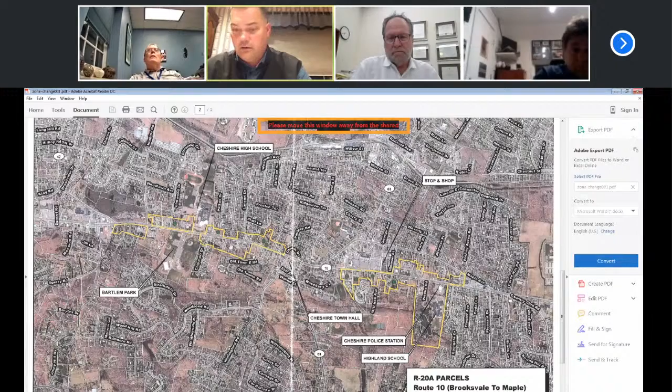Anybody? Okay. Seeing none. Do we have any comments from the public on this application? No, Mr. Chairman, no comments. Okay.

All right, John, anything else to add to this? No, I'm happy to answer any questions. I think it's an opportunity, and anything we do there under an R20A would be a special permit application. So there's an opportunity to review both the design, the architecture, the appearance, the use, obviously. So I think this is an opportunity to add an attractive use to this location, something that can be an asset for the town and be visually attractive.

So I'm hopeful that we have that opportunity to come in with a subsequent application that the commission will review under a special permit and a public hearing application. Yeah, it sort of makes sense. Everything else around it is R20A, so it is kind of out there on its own.

So, Mr. Kurtz, I'm sorry. Yes, I was on mute, I couldn't get myself off mute. So, quick question, John. Any residual effects from the gas station being there? Is there any contamination, anything going on the property, or is that all set?

Yes, there are some residual effects from that. It's been gone. We did not do it, our firm did not do it, but a separate LEP did extensive review over there. There is some residual issues, but they are not emanating from the site, and they're deep enough so that they're not practical to be excavated. So that any development there would be restricted in terms of excavation and the types of foundations.

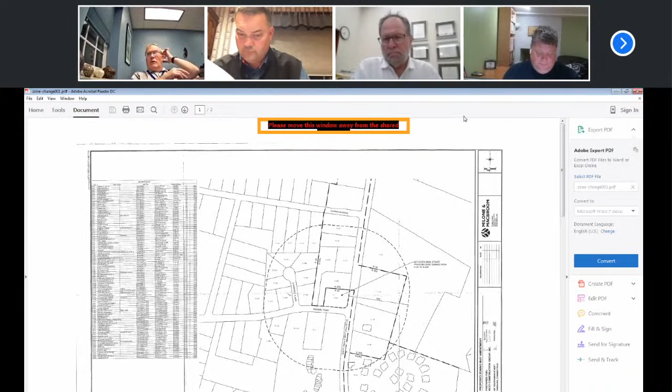Mr. Chairman, if I may, that information will be made available to the commission when they bring in a specific application for development. You will have the reports from their LEP, and you will see how that influences the way they're going to design the property. So we'll make sure that the commission gets that for the development application. We do agree with John's summary of the reports, but we'll give you more specific information when they bring in a development application. So, okay, thank you.

Okay, any other commission members? Questions or comments?

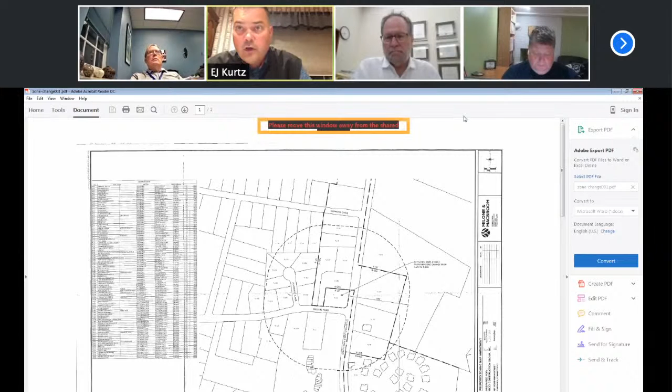Okay, I guess I'll be closing this public hearing. Thank you very much, Mr. Chairman. If I may, I was able to get Dave Carson on the phone. His computer's not working, so we won't be able to see him, but it looks like he'll be able to do a verbal testimony, and we'll try to assist him as much as we can.

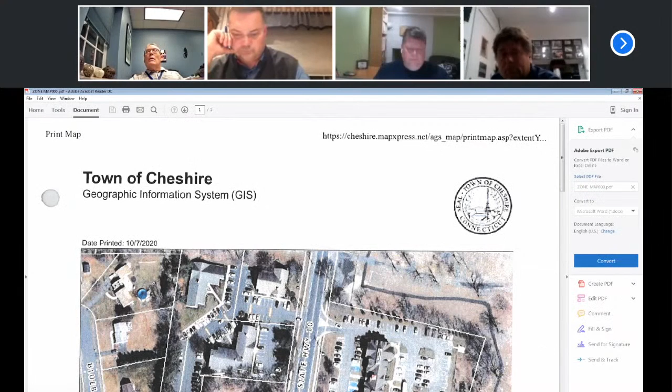Since we were hopeful that this piece could either be leased or purchased in the future, prior to our most recent expansion, we had done a master plan in-house to assure that if we were able to do this lot, we could interconnect it with the existing parking facilities, and we have been able to accomplish that integration and actually improve the overall circulation between those upper parking areas.

As noted on the plan, the area to the rear of that parking area closest to Reinhardt Road will be principally used for employee parking. The rest will be obviously available for customers.

This expansion would add 60 spaces to the existing 180, bringing the total to 240 spaces. At that number, a major traffic generator permit will be required for over 200 parking spaces. We have already been in preliminary contact with OSTA regarding this, and pending favorable action by your commission, we will be proceeding with that particular process.

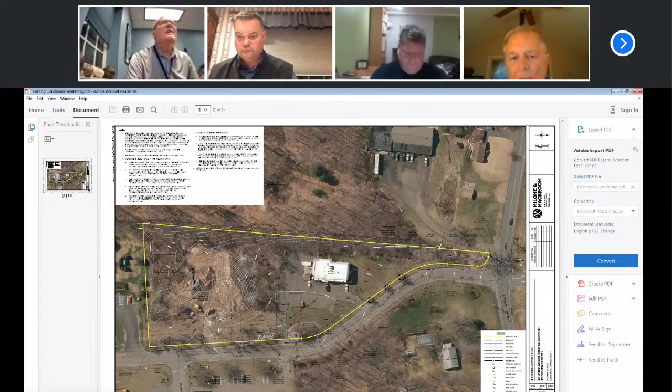The map in front of you is a colored aerial representing the existing conditions of the site. The orientation is with north to the right, so south is to the left. Diana Court, which the majority of the site fronts on, is at the bottom of the sheet to the east, and to the west is primarily undeveloped land. East Johnson Avenue is to the extreme north of the property, on the right of this map.

Currently, the property includes a small office and warehouse light industrial building with a fairly small parking lot, focused mostly on the northern side of the site. To the south, there are some stockpiles that have been there for some time.

Adjacent uses to the property on the east, the opposite side of Diana Court, include an office building and, to the northeast, a residential property. To the west is a light industrial building with the majority of that site being undeveloped, and to the south is an industrial bakery. All properties in the vicinity, including this one, are in the I2 zone.

A significant element and restriction to the site is two easements located almost parallel to Diana Court: a 50-foot wide gas transmission easement and an electrical distribution easement, which puts some limitations on the property in terms of grading restrictions and landscaping, which I'll touch on a little bit later.

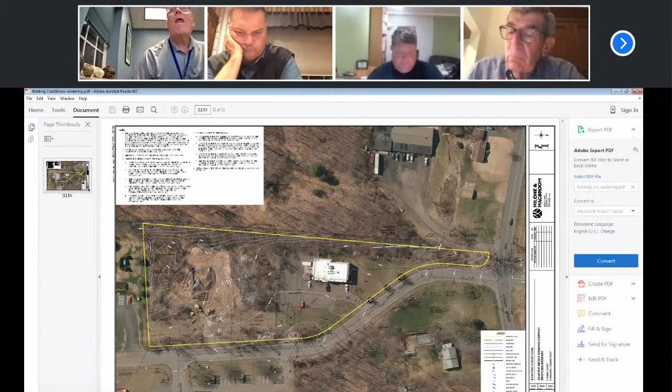All utilities are available: natural gas, public water, sanitary sewer. There are wetlands on the site, primarily in the northwesternmost part, really amounting to a small drainage ditch capturing runoff from properties to the west. A wetlands permit was granted by the Inland Wetlands and Watercourses Commission.

The plan in front of you represents a colored rendering of the proposed site conditions. What we're looking to do is keep the existing building in place, which will be used for office purposes for the proposed brewery, Counterweight Brewing. Counterweight seeks to build a 20,000 square foot brewery on the south central portion of the site, which will be connected to the existing office building with a greenhouse-like structure and a large patio area.

As part of this brewery, it will include a tap room or tasting room, which is a small portion of the overall size of the building but has a high demand for parking. We analyzed the brewing operation as an industrial use, the tap room as a restaurant use - although I don't know if it exactly meets the standard of restaurant, it seemed the most appropriate approximation for this style of use - and also a minor office component in the existing building. The result is that we need approximately 108 parking spaces on the site.

We're proposing 118 spaces, so a little bit beyond what's required by the regulations.

We are installing a new parking lot adjacent to the existing building, to the north of it, and larger parking areas to the east and south. The south side of the building will also include loading areas for tractor trailers and small box trucks.

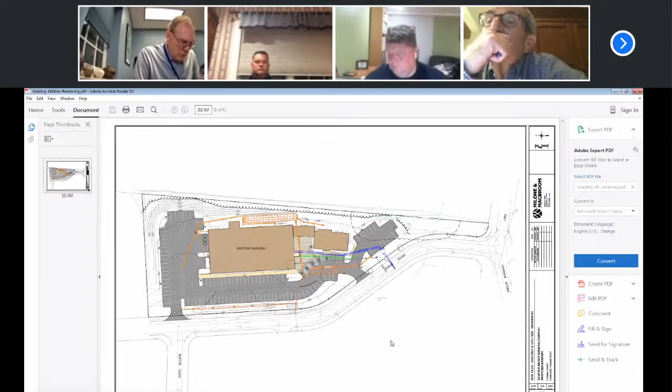Additionally, the site plan includes a detailed landscaping plan which meets the zoning regulations for shade trees and parking areas. Going back to the gas easement, we're limited in terms of placement of shade trees within that area. They do clear-cut those gas easements periodically, so we're limited to small shrubs and decorative grasses within the easement itself.

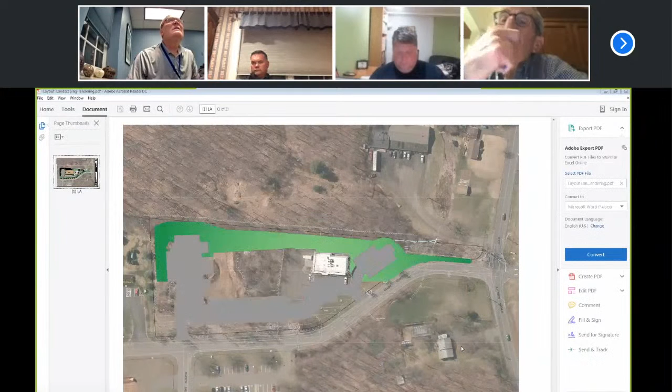This plan in front of you represents a colored version of our landscape plan, with a line of decorative grasses between Diana Court and the parking lot, and some shade trees where we can place them without interfering with existing utilities, existing easements, or proposed site features.

Lastly, with the increase in parking spaces, building coverage, et cetera, we have a change in coverage that results in an increase in stormwater runoff. To mitigate that, we've proposed 3 distinct underground stormwater storage areas sized to allow for no increase in runoff for up to the 100-year storm event.

All stormwater will be directed on site to these underground systems via a standard pipe and catch basin system, and a proprietary oil and grit separator contact unit will be installed prior to the underground storage area to provide adequate water quality flow, trapping oil, floatables, sediment, etc. All designed in accordance with the 2004 DEP quality manual.

With regards to traffic impact, we provided a traffic report prepared by Dave Sullivan of our office. His findings, based on proposed traffic generated using the ITE, Institute of Transportation Engineers manual, show that this use, along with proposed uses not yet operational in the vicinity—namely Whole Foods and a medical office building on West Johnson Avenue—will have minimal traffic impact. In fact, there'd be no discernible change in level of service on East Johnson Avenue and out to East Johnson Avenue and Highland Avenue.

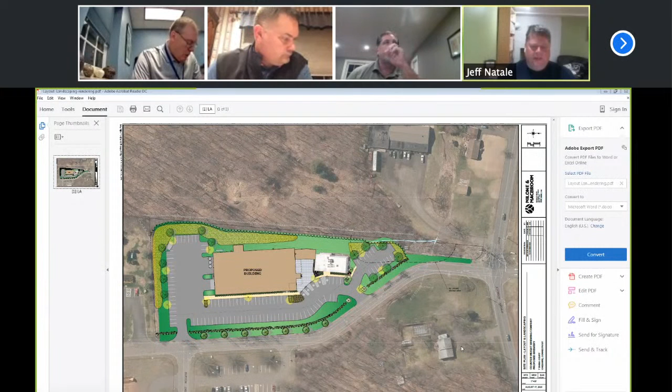I believe I read in the application and the information we received today that the area between the two buildings is where the outdoor seating would be. Correct. Thanks.

Chairman? Yeah, Scott again. Is there going to be any kind of food? Is there a restaurant in here? Are there food trucks? If there's food trucks, is there area for parking of those food trucks? Do they take up customer parking spots? Yeah, our plan is to have rotating food trucks as we do in our current location. How they operate currently is they usually take up about two spots when they visit us. As far as indoor food, we currently have a food service license that allows us to heat very limited menu items, but only in the event that a food truck cancels or somebody's not available to service our customers in that regard. Thank you.

Okay, any other commission members with questions? Bill, do we have comments to read into the record on this one? I do, Mr. Chairman. Fire Department, dated September 24, 2020: the Fire Department has reviewed the above application for the planning and zoning process. We recommend the following common stipulations: one, a fire hydrant will need to be installed in the area of the fire department connection, final location to be approved by the fire chief or his designee; and two, fire department approved emergency knox boxes will need to be installed and maintained, final locations to be determined.

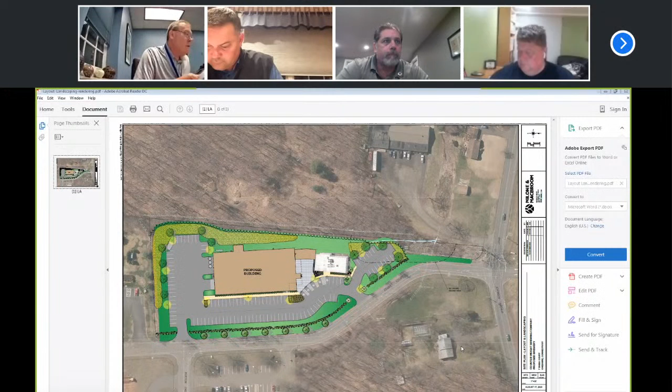Let's see, I have the engineering department comments. We had comments again from Anchor Engineering. They had a number of comments that were addressed. We did get a letter from Don Nolte dated September 23rd, 2020. This department concurs with the attached review comments by our consultant. We suggest that they be considered for incorporation as conditions of approval if the Planning and Zoning Commission grants a permit. Let me find their comment, hold on.

Do you have a question? Okay. Sean, go ahead.

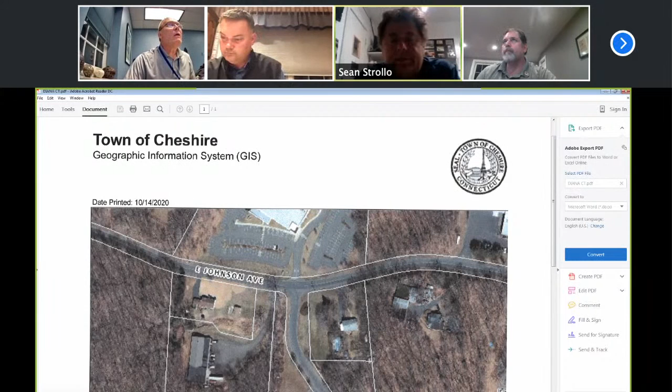The existing building that's there on the site, I know you're incorporating it. Are they doing any changes to that building, or just branching off and joining the two with the greenhouse?

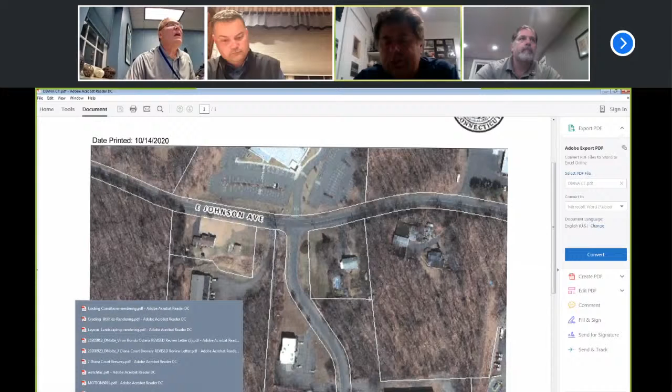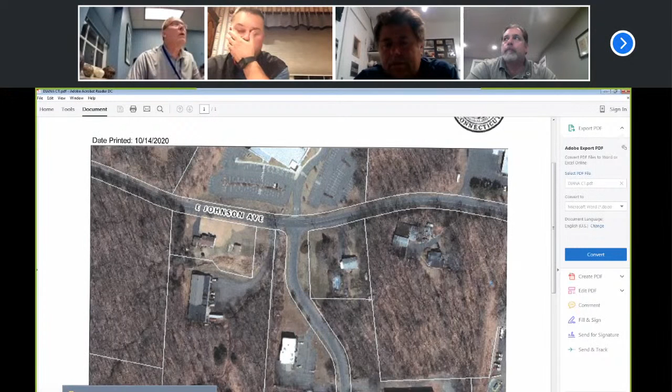There's no proposed changes to that building other than a door to connect that greenhouse. On that building right now there's a garage on the left-hand side of the existing building. Is that going to be turned into offices, or just join into the other part? The garage door area would connect the buildings, and the rest of the building would be office space. So the garage area will be where people sit also? That'll be closed off as you enter the new building, and that'll be overflow storage for us.

On the new building, on the left side, what's the distance between the parking spot and the edge of the building, Brian? My scale with me, it's over 100 feet. It's over 100 feet? That's right.

As far as deliveries, on those big tanks, do they come in with tankers or a box trailer to deliver things to make the beer? We have basically trailers that come in with our bulk grain that fill the silos, and it gets blown pneumatically into the silo. We get those usually about once a month, and the silo's worth will last us roughly in the new space about 30 days.

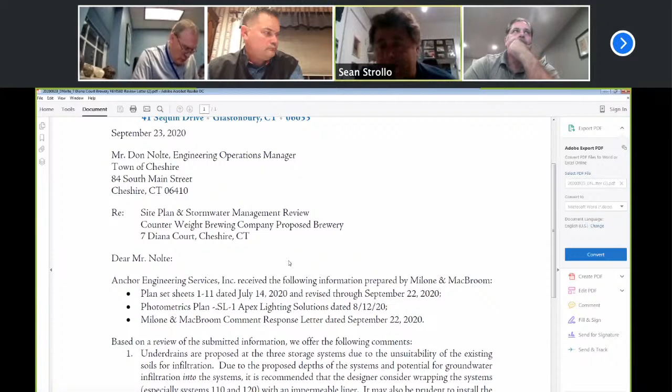Mr. Chairman, if I may, just to read the engineering comments. I have some comments for regional water, but these are the revised county comments dated September 23rd, 2020. Based on a review of the submitted information, we offer the following comments. One, under drains are proposed in three storage systems due to the unsuitability of existing soils for infiltration. Due to the proposed depth of the systems and potential for groundwater infiltration into the systems, it is recommended the designer consider wrapping the systems, especially systems 110 and 120, with an impermeable liner.

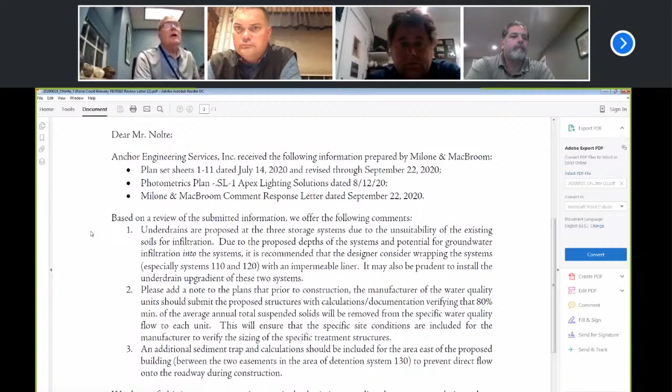It may also be prudent to install underdrain upgradient of these two systems. Two, please add a note to the plans that prior to construction, the manufacturer of the water quality unit should submit proposed structures with calculations, documentation verifying that 80% minimum of the average annual total suspended solids will be removed from specific water quality flow to each unit. This will ensure that the specific site conditions are included for the manufacturer to verify the sizing of the specific treatment structures. And three, an additional sediment trap and calculation should be included for the area east of the proposed building, between the two easements and the area detention system 130, to prevent direct flow onto the roadway during construction.

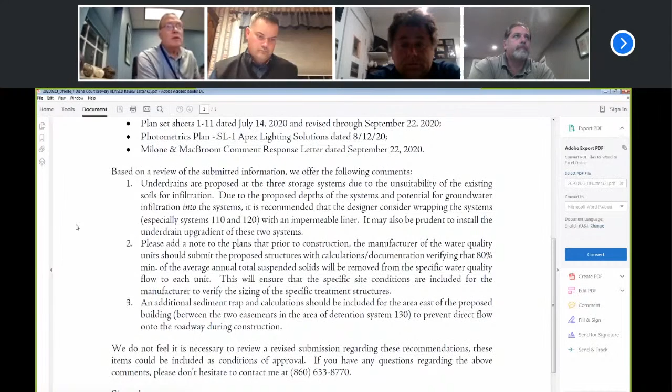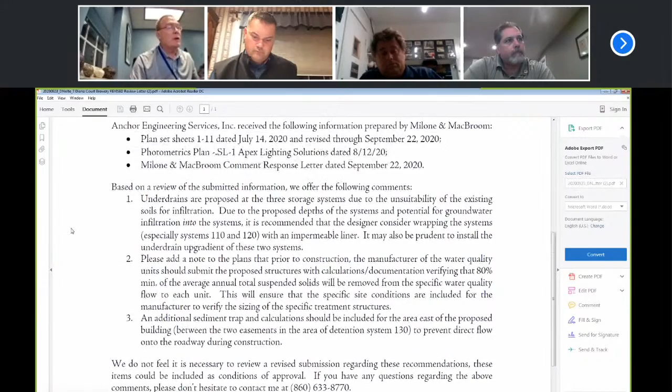We do not feel it's necessary to review a revised submission regarding these recommendations. Those items could be included as conditions of approval. If you have any questions regarding the above comments, please don't hesitate to contact me. It's Denise Lord, professional engineer from Anchor Engineering. And as I noted, Don Nolte is satisfied that these can be included as conditions of approval.

And I do have some comments from the Regional Water Authority dated September 3rd, 2020, regarding Counter Weight Brewing, 7 Diana Court. The Regional Water Authority has reviewed the above referenced application. The property is within the North Cheshire Aquifer Protection Area. The applicant is proposing to construct a 20,000 square foot building and related parking for a brewery. A brewery is an allowed use in the Aquifer Protection Area.

Stormwater will be managed using infiltration galleries with a hydrodynamic separator and isolator row to act as pre-treatment prior to infiltration. The building will be heated with gas, connected to the sanitary sewer, and served by public water.

Based on the information submitted, we have the following comments: first, the erosion control plan appears adequate. Second, the stormwater management system is acceptable to the Regional Water Authority. The pre-treatment of stormwater prior to infiltration in the Aquifer Protection Area is highly recommended by the Regional Water Authority.

Third, during construction, all fuel, oil, paint, or other hazardous materials should be stored in a secondary containment, removed to a locked indoor area with an impervious floor during non-working hours. Fourth, if fuel is to be stored on site, it should be located within a secondary containment system to prevent leaks from entering the environment, sheltered from precipitation, and in a secured area.

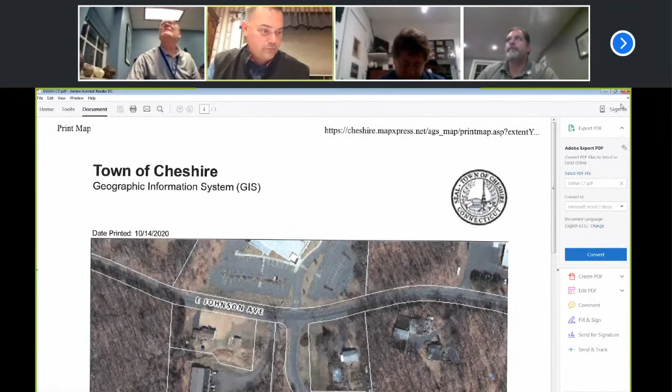Ryan, you said there was somebody from Borghese on the call. Can you go over quickly a little bit of the building, tell me where the public is going to walk in, and maybe if there's a separation between where the brewing is done, just a quick overview of the building would be great.

Sure, do you have a copy of the floor plans there? I'm not sure I have them. The Commission has them in front of me if you can't pull them up on the screen. Yeah, it's good.

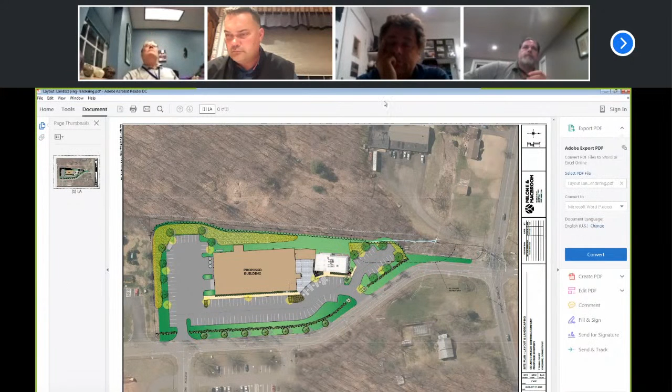Okay, so the way the building's set up, here's the large portion of the building, here's the small connector, and here is that paved courtyard area. The main entrance is going to be into here, this being the tasting room with the associated bathrooms. So this is pretty much the division between the public area and the brewing area.

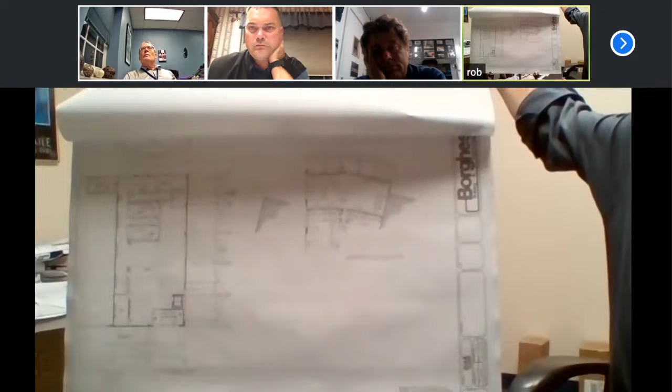In addition to that lower level public area, there is a mezzanine above that which would have another tasting area above that with associated bathrooms. Mixed in with that tasting area in the back are some offices directly associated with the brewing process. Same thing down on the lower level.

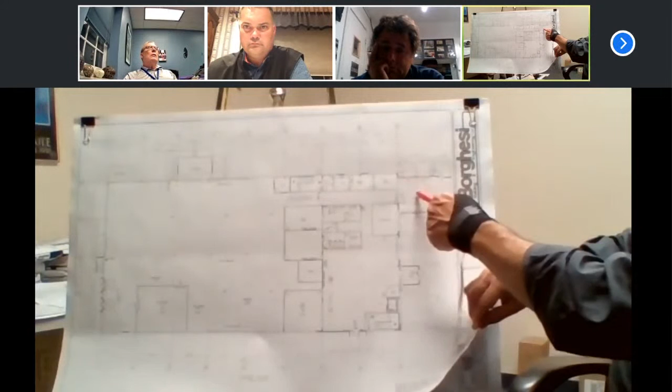There's some support areas, a small lab and office, break room, and tool room. Then adjacent off of this tasting room in the back, that's where that connector building is going to be. It's kind of like a greenhouse. We looked at doing an actual greenhouse, but there were a lot of issues with that.

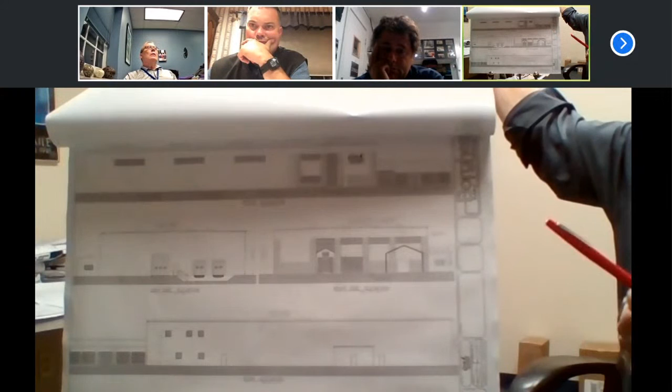So if you look at the elevations themselves, it's going to be a hard roof structure. The walls will be operable glass doors that can be opened up so in warmer weather it becomes more like a pavilion type space. That connects the building to the existing building, connecting the two buildings.

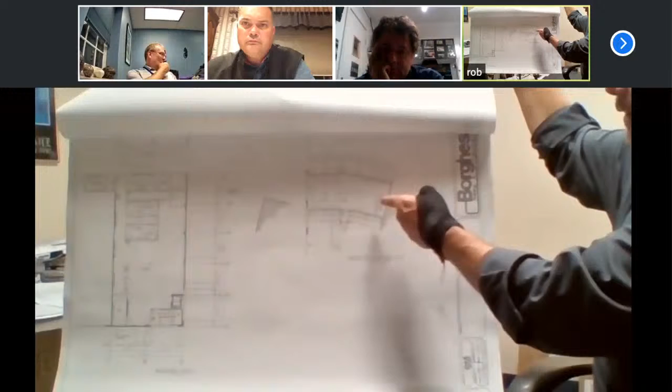So that actually goes—if you look here, this is the main building, the brewery building. Here's the connector, and it's going to attach to the left corner if you're standing in the road. What we're going to do is cut in an overhead door so you can get between the two buildings.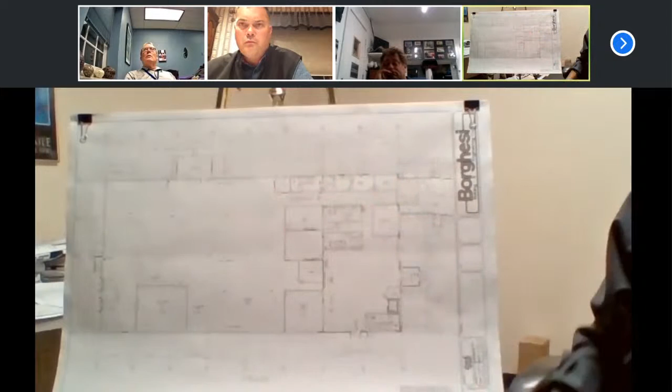But the public area, I'm going to say, is really an area 50 feet by the width of the building, or the depth of the building, which is 100 feet. So you have 5,000 square feet dedicated to that public space. The rest is the brewery area, the actual production space.

Okay, great, thank you. Any other commission members' questions? Mr. Ricardo: those grain silos, are those milled grains or are they whole? Do you have to worry about any kind of explosion possibilities with them? No, they go into the silo whole and we mill them inside the building in an explosion-proof room.

Got it. Elevation of these two buildings, are they both the same height? Is one higher than the other, the pre-existing building?

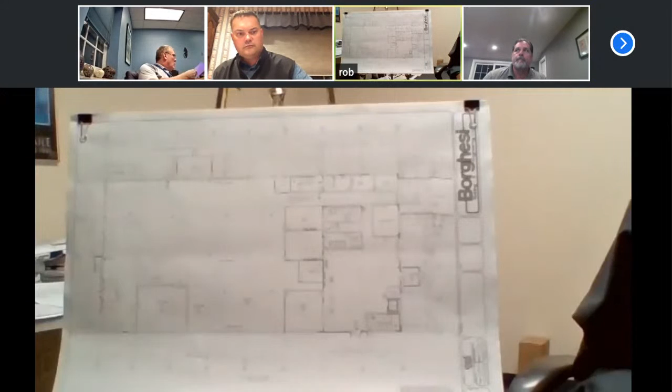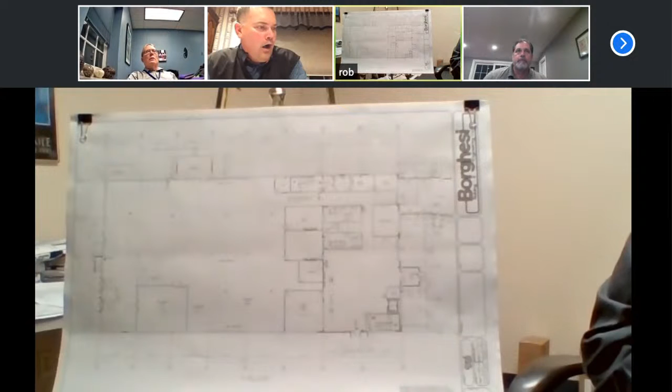Say that again? The elevation of the existing building and the new building. It's a height difference - I think Ryan's got that on his drawing, about a 2-foot height difference between the two. Reason being, Ryan was limited as far as what he could do for grading because of the gas transmission line, so that set the tone for the height of this building. That connector building is actually going to have a pitched floor from one building down to the other.

Okay, any other commission members, questions? No, do we have any public questions or comments on this? No, Mr. Chairman. Mr. Fazone, was that the end of the presentation? Anything else to add? No, I think that's it.

Mr. Chairman, do we expect that any further input will be needed at the site plan portion of the meeting, at the regular meeting? We took it all here. I don't see why anybody else would have anything more. Is there anything else you want to say? No, I just wanted to - it was meant to be incorporated all in one part here.

Okay, thank you. In case you want to check out and hang out with your kids, in other words? Stop my video at least.

I got it. Okay, with that, I will be closing this public hearing. Thank you. All right, moving on to our last item.

A special permit application of Hope Reinhardt, 104 Elm Street, for nonprofit used bookstore training. Special permit application of Hope R. Reinhardt, 52 Williams Road, Cheshire, Connecticut, 06410, for a nonprofit used bookstore training facility or training location. Property located at 104 Elm Street, Cheshire, Connecticut, generally shown on Assessor's Map number 64, lot number 268, in an R40 zone. Packet information is available for review on the town website homepage under Documents, distributed and displayed during virtual meetings.

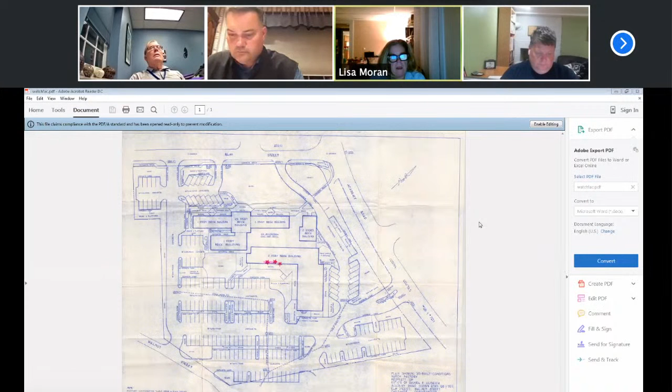We're renting in the lower level at the Watch Factory. It's 2 spaces actually, 104 and 105, about 1,600 square feet. We have an entrance and an exit door, 2 bathrooms, a small kitchen. And what we will be doing is hiring and training kids in our community that have special needs to work in a retail situation. We'll be selling used books and some crafts that the kids will be making. I don't know what else to say - I guess that's it.

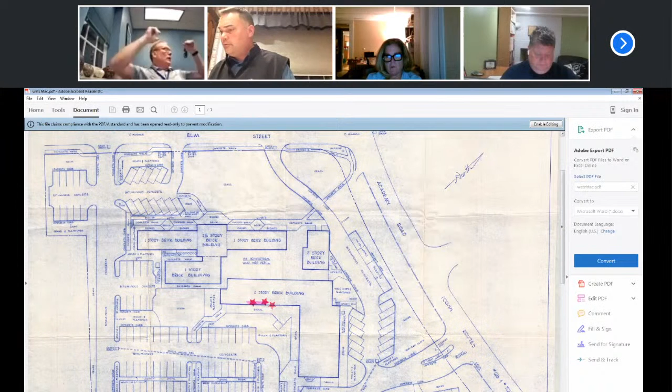Okay, sounds like a worthy cause. Anyone have any questions on this application? None. Okay, how about comments? Any comments? No, Mr. Chairman. Suzanne, nothing, right? No, Mr. Chairman, no comments from anybody. Public? No, nothing.

Okay, all right, this one's a pretty easy one. If no one else has any comments, I'll be closing this public hearing. Thank you. With that, I will entertain a motion to adjourn the public hearing. Motion to adjourn, Mr. Mercado, second by Mr. Kader. All those in favor, signify by saying aye.

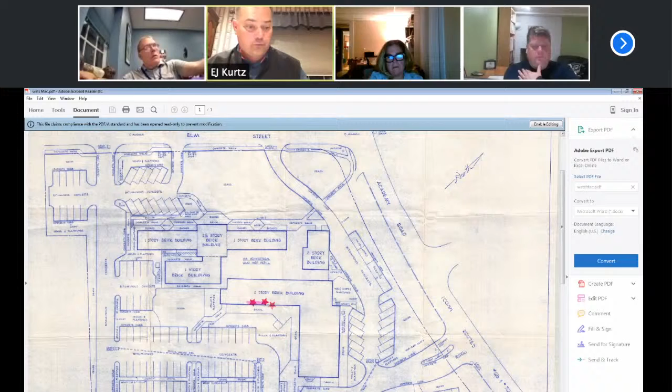Aye. Okay, moving on to the Planning and Zoning Commission special meeting for Wednesday, October 14, 2020. Can I get acceptance of the minutes from our special public hearing and special meeting from 9/29/2020? Motion to approve both, Mr. Natale, seconded by Mr. Mercado. Okay, any changes, anything to the minutes that need to be added?

Okay, and as far as regular members, I believe it's just Mr. Bowman we don't have here, correct? Mr. Dawson's not here either. Okay, so we're going to take Mr. Anderson and Mr. Selma on this, as long as you were both here. Were you both here? Yes. So all those in favor of the motion signify by saying aye. Aye, aye, aye. Anyone opposed? Anyone abstaining?

Okay, motion carries unanimously. Unfinished business. Do we have a motion for Rondo's Realty? I do, Mr. Chairman. Special permit modification, 1721 Highland Avenue for the expansion of the restaurant parking lot.

The Cheshire Planning and Zoning Commission finds that the proposal to construct 63 additional parking spaces as shown on plans entitled Site Development Plans for Byron Rondo Asteria, showing proposed expanded parking facilities located at 1721 Highland Avenue and 1704 Reinhardt Road, Cheshire, Connecticut, revised through October 14, 2020, are consistent with the requirements set forth within Section 40 special permits of the Cheshire zoning regulations, and hereby approve this application conditioned upon the following: compliance with comments from Anchor Engineering, the consulting engineer for the Cheshire Engineering Department, dated October 12, 2020, and compliance with comments from the Cheshire Fire Department, dated September 23, 2020.